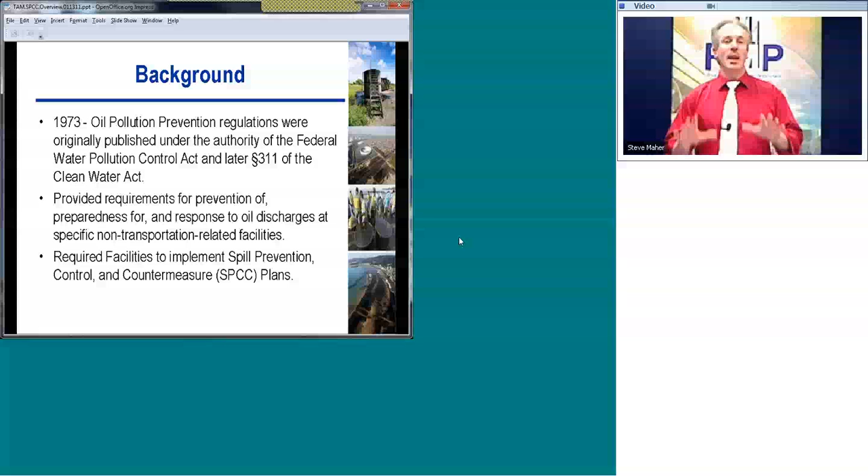However, the SPCC plans are focused on above-ground storage tanks, and that's what we're going to be focusing on - the regulations that apply to that.

Originally in 1973, partially in the aftermath of the late 60s release from platform A21 off the coast of Santa Barbara, oil pollution prevention regulations were originally published. It was later absorbed into the Clean Water Act, and these provided a basis for trying to prevent releases and also responding to those emergencies should they occur. It provided requirements for prevention, preparedness, and response to oil discharges, and it was specific to non-transportation related facilities. That's one of the things you have to be really careful of with these SPCC plans - where do they draw the line of what's covered and what's not.

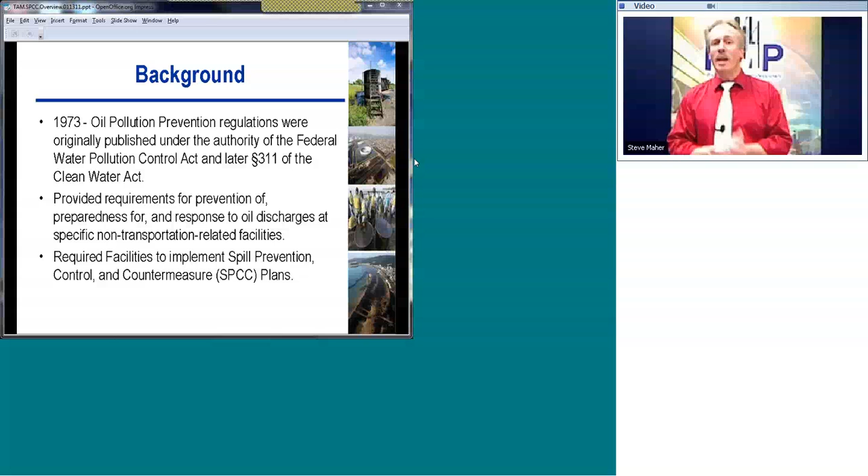SPCC plans, in the context of what we're looking at, primarily cover above-ground storage tanks with quantities of oil above certain thresholds - I'll talk about the quantities, the different tiers, and the types of oil in a few minutes. Basically, the idea of all these regulations is to put that SPCC plan together.

As I mentioned, several historical events precipitated this. Specific to the SPCC plan itself, the main trigger was the Floreffe, Pennsylvania oil spill. This is a 4 million gallon oil storage tank that split apart and collapsed. I believe one of the root causes was a brittle fracture of the carbon steel tank itself, and you'll see some photographs in a few minutes that are very evident that it was rather cold at the time.

This is at an Ashland oil storage facility, located near the Monongahela River, and the results of the spill had a significant impact on the river. We'll show you some aerial photos in a few minutes. And of course, in addition to all the environmental impacts, the legal and financial impacts on the company are very significant.

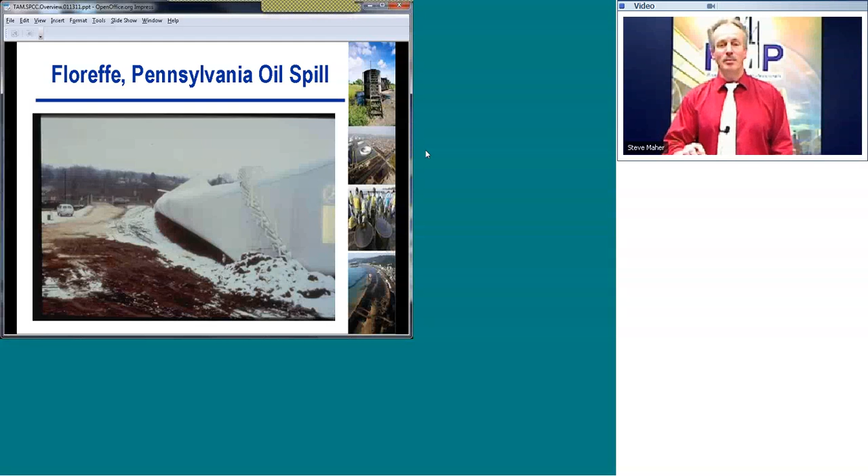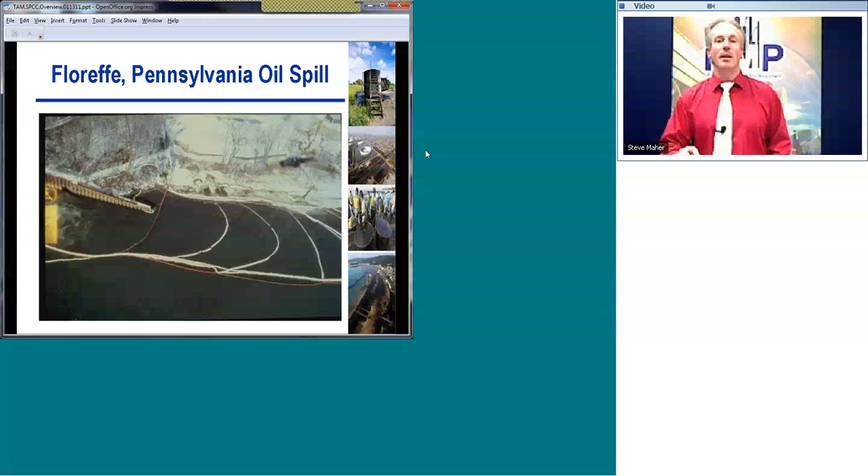So in response to the spill, the EPA formed a task force to look at the federal regulations governing oil spills from above ground storage tanks. Again, that's the primary focus. There are some caveats for below ground storage tanks - we'll get into those shortly.

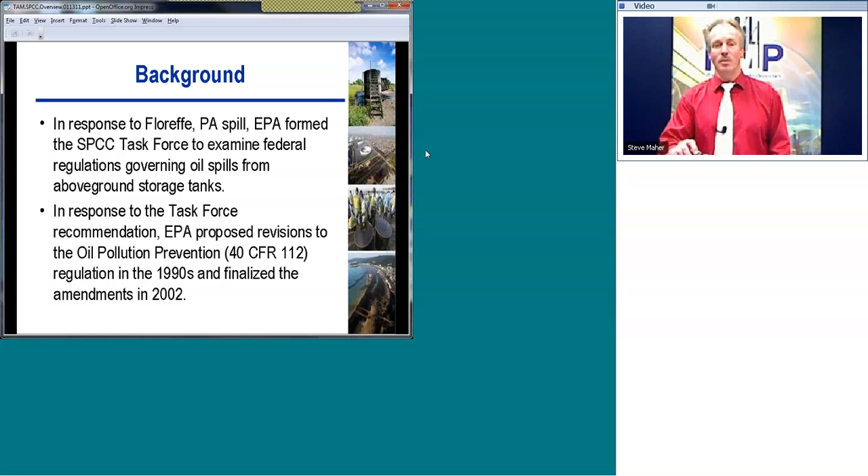In response to that task force recommendation, the EPA modified the oil pollution prevention regulation in the 1990s and finalized the amendments to the SPCC requirements in 2002. Since then, people have been implementing it and the EPA has been monitoring it. There are also various state programs that we'll be talking about in a few minutes.

But the EPA has amended the SPCC requirements of the Oil Pollution Prevention Act to extend compliance dates, clarify, and tailor specific regulatory requirements. For those of you doing your SPCC plan, there's a lot of gray areas in terms of diking adequacy, what's covered, what's not covered, types of oils. There's also a lot of things required by the letter of the law that in a lot of cases hardly represent a potential risk. These are all things you've got to deal with as part of the SPCC plan compilation.

The final rule was promulgated in 2002. Various amendments have taken place, and several deadlines were established. I think a lot of it was because of the economy and also the need to have a well-trained staff of regulators to properly enforce it. Compliance dates have been pushed off quite a bit, and a lot of people have enjoyed those relaxations.

And the latest compliance date for most people to formulate or update their SPCC plans is November 10th, 2011. That's what everybody should be working towards right now. Of course, there are exceptions - I'll get to those in a few minutes.

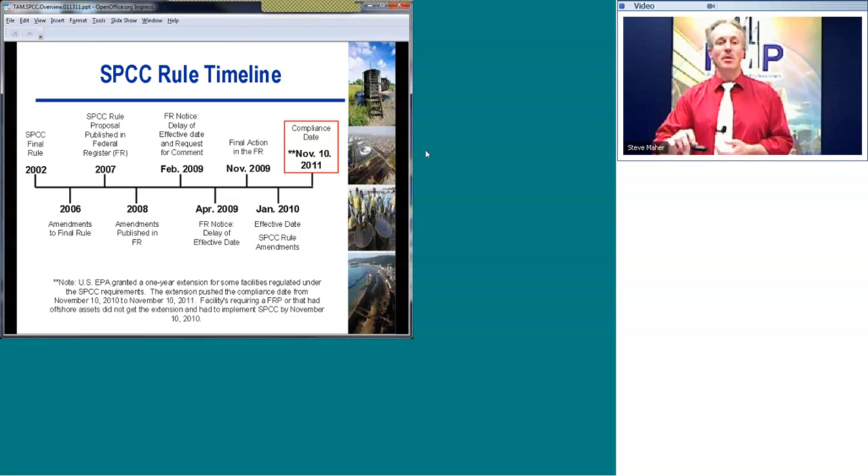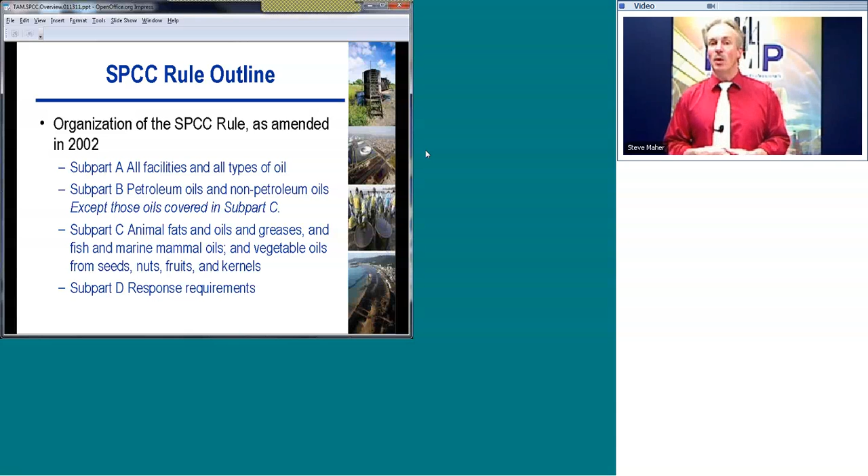Subpart D provides response requirements and clarifies those. Again, the key purpose of the rule was to provide requirements for prevention of, preparedness for, and response to oil discharges. There are a lot of other types of chemicals you may be concerned about that certainly could be harmful to the environment - things that are very acidic, things that are very caustic. Those sort of things are important to address, but are not specifically covered by the SPCC.

Again, the SPCC's primary purpose and focus is oil discharges, and it's also for non-transportation related facilities. Once it hits the road, it's governed under different regulations not encompassed by the fixed facility SPCC plans. The main objective is to prevent oil from reaching navigable waters and adjoining shorelines. So what does that mean? It means you want to have design, containment like diking, and emergency response plans that apply good or best practices to prevent that discharge from ever reaching navigable waters. Again, the focus is oil.

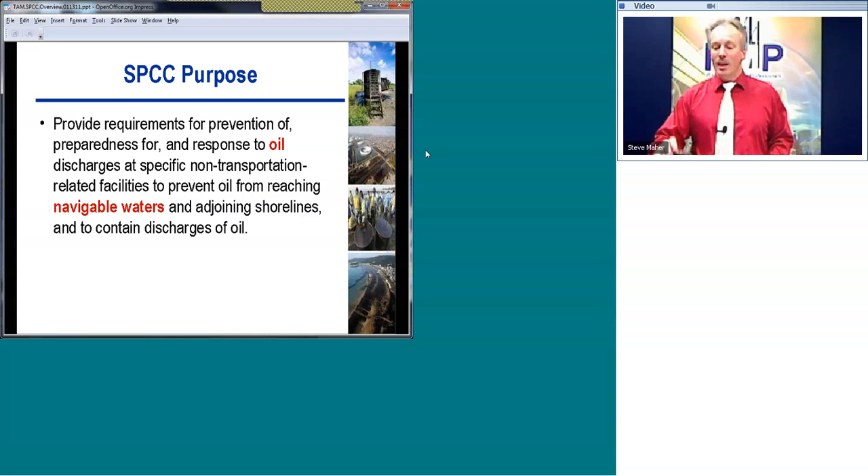Now, what does oil mean? Oil actually encompasses, by the SPCC requirements, a large number of chemicals that go way beyond just petroleum-based oils. Oil means any form, can be fats, which are solid above certain temperatures and typically at ambient conditions, oils, animal greases, fish, vegetable oils, oils from seeds, nuts, fruits, kernels, other oils and greases. Of course, it includes petroleum, it includes fuel oil, things that are like lighter hydrocarbons, sludge, which are very, very heavy hydrocarbons, synthetic oils, mineral oils, oil refuse, and oil mixed with other wastes.

You've also got a requirement to cover produced water from an exploration production facility that has certain quantities of oil in it, and again, we'll get to that shortly. So the main focal point, the main thing I want to get across here is it covers a very wide range of activities. Now, based on the kind of material, the amount of analysis that you do, the amount of things that go in your plan may be very different.

For example, fats, greases, things that are normally solid at ambient conditions - if there is a breach or a containment release and you're keeping the material heated so it's in a liquid state, and then if it's breached, it starts to cool down once it hits the ground and starts to solidify, those are the sort of things you can consider when looking at diking size, when looking at your emergency response activities, and what kind of requirements you have for emergency response. So again, you've got to consider very wide ranges of materials, but the types of materials and how you treat them and how they get handled in the SPCC plan can be quite different.

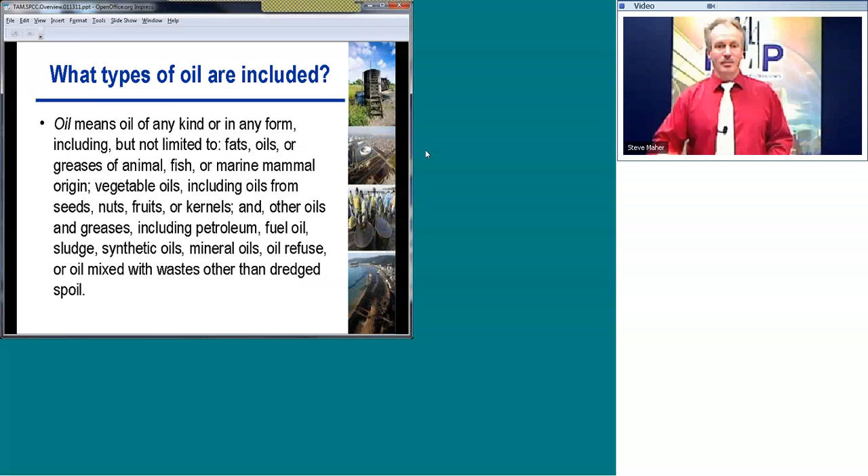And here's a challenging area. What are navigable waters? Let me go ahead and start with the definition, then we'll have a little discussion on that. Okay, based on Section 502(7) of the Federal Water Pollution Control Act, the navigable waters include interstate waters, intrastate lakes, rivers, and streams, which are utilized by interstate travelers for recreational or other purposes, and intrastate lakes, rivers, and streams from which fish or shellfish are taken and sold in interstate commerce.

Now, that doesn't sound like - if you read that, you probably look at that and go, gee, that doesn't apply to me. I don't really have a lot of things that are near navigable waters. Well, the interpretation can be broad or very narrow, depending on what EPA region you're in or what local jurisdiction you're in. Our observation is there's a lot of variance in interpretation.

The extreme case, and what I've heard a lot of regulators say, if push comes to shove and you've had a spill and they're in charge of deciding if you get fines or not, is you can be almost in the middle of the desert, and if you have a release and it can, over long periods of time, eventually percolate into some sort of river stream or get into the ocean, then basically in their mind that's something that's covered by SPCC.

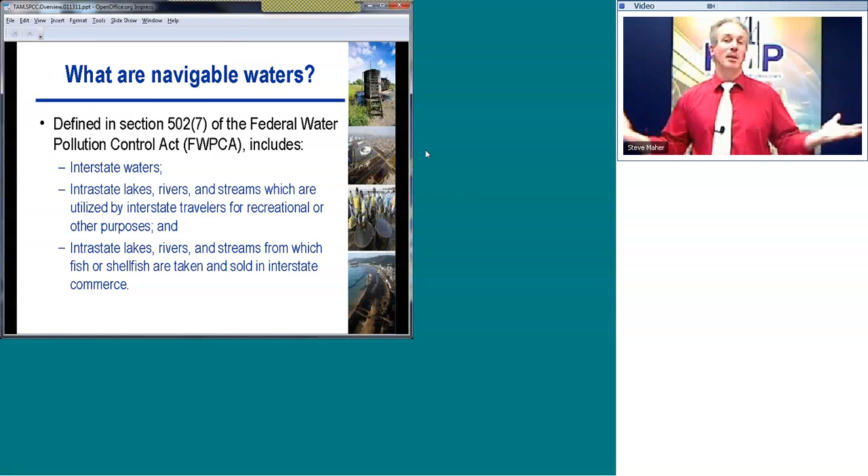My recommendation, again, is make a conscientious decision in light of your responsibility in terms of operating your facility to protect the environment and also to protect your company, and make a good decision in terms of how extensive you need to apply these kind of things, recognizing that your perspective on what makes sense may not jive with what a regulator's perspective is, especially if you've had a spill, they're in the political spotlight, and they're in charge of deciding whether to fine you or not.

Okay, again, general applicability is a facility with oil storage capacity exceeding 1,320 gallons in above ground storage containers and also where the capacity of each storage container included in this aggregate amount is 55 gallons or greater. That could reasonably be expected to discharge oil in harmful quantities into navigable waters of the United States or adjoining shorelines.

Again, there's some words like reasonable, and we discussed navigable waters. These things can be - we have seen vast differences in interpretation. Again, highly recommend that you take a good look at your system and also work with the regulator, and also if somebody's doing your SPCC plan, ask them, if they're not doing it for you, how this compares to what other folks in your area are doing. And also there is a provision for underground storage tanks of 42,000 gallons or more.

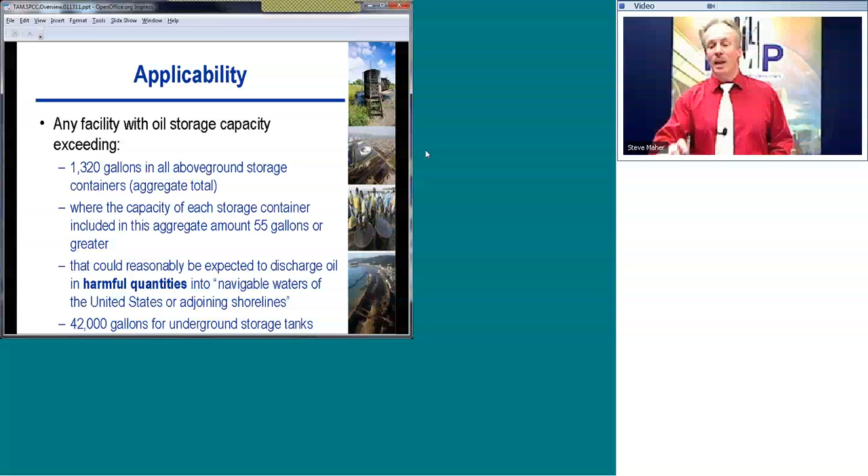Okay, what are harmful quantities? Basically a discharge that violates applicable water quality standards or causes a sheen upon or discoloration of the surface of the water, and may also have the potential to seep, leach, or flow into navigable waters.

This gets back to being rather qualitative. You're looking at something that causes a sheen, has the potential to seep. These are things that are subject to interpretation. My recommendation is to get somebody who's familiar with the applications in your area, what the specific requirements are, and make sure that you're doing something that makes sense. When in doubt, do something that really shows you're doing your job to protect the environment.

Okay, there are some exemptions. Under the SPCC requirements, there are some exemptions that apply when calculating aggregate totals. Basically, if you've got containers with storage capacity less than 55 gallons of oil, they don't have to be considered in the aggregate. Permanently closed containers, motive power containers, wastewater treatment facilities are exempted. Hot mix asphalt and hot mix asphalt containers are exempted. Residential heating oil containers, pesticide application equipment and related mix containers, intra-facility gathering lines subject to DOT regs, and also underground oil storage tanks at nuclear power generation facilities.

There are some very specific exemptions. If you fall in these categories, great, but most of these won't apply to the mainstream of a lot of the oil storage and production facilities that are out there.

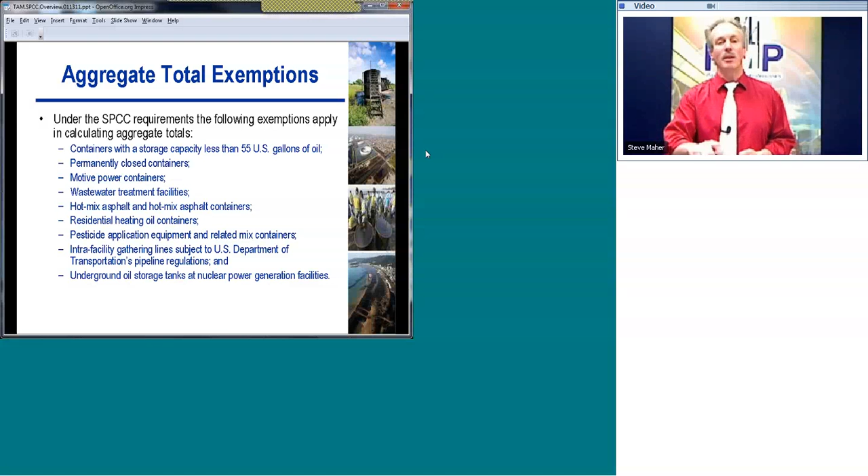There are various categories of SPCC that are based upon the total oil storage capacity. Depending on this aggregate total, you may be in various tiers, either Tier 1 or Tier 2, which is termed a qualified facility, or as an all-other facility. Tier 1s are facilities considered to have a lower environmental risk, and commensurate with that, you have less work to do for your SPCC plan. The all-other facilities category is the catch-all. If you can't fall into these lower tiers, you're in this all-other facility category, which means a full SPCC plan signed off by a professional engineer.

Tier 1 and Tier 2 facilities have an ability to use templates and have either no sign-off by a PE or a limited review and sign-off by a professional engineer. What type of professional engineer needs to sign off on that? What do they need to do for sign-off? We'll cover that in just a few minutes.

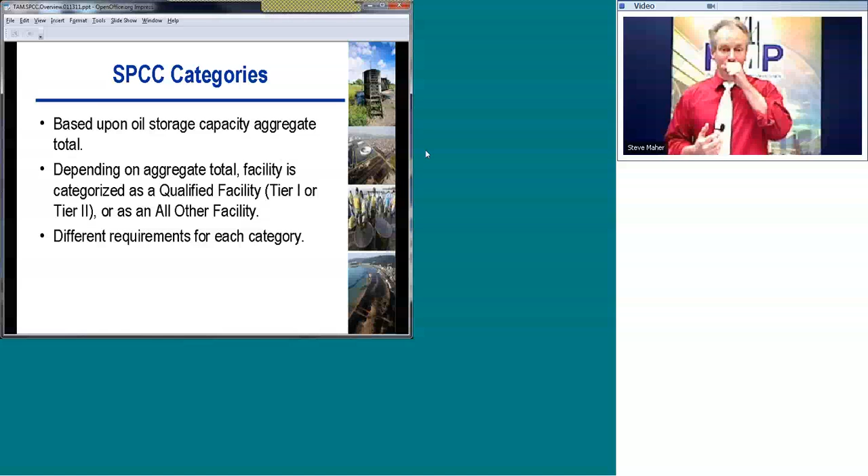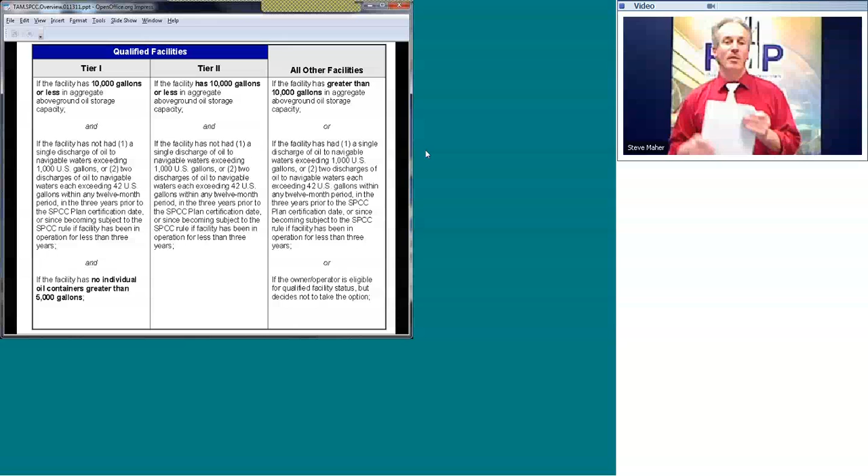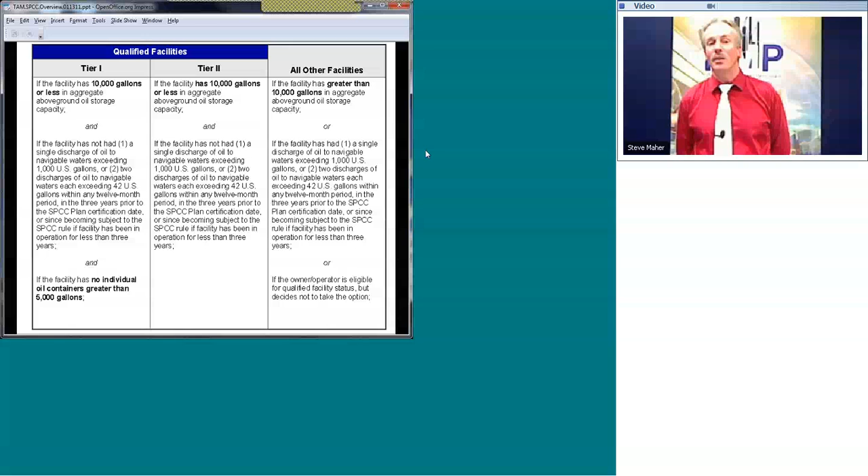All right, this is a rather extensive table, and I'm not going to read through all of this. Basically, this defines the different tiers. As I mentioned, the all-other facility category is if you have greater than 10,000 gallons in aggregate above-ground oil storage capacity. Tier 2 is if you have this, but you have not had a discharge, and you also have lower quantities. It has lower requirements, and even lower requirements are associated with Tier 1 facilities, which if you have 10,000 gallons or less in aggregate above-ground oil storage capacity, and you haven't had significant discharges, you can use templates and apply Tier 1 criteria to do a lot less work, which is also a lot more maintainable.

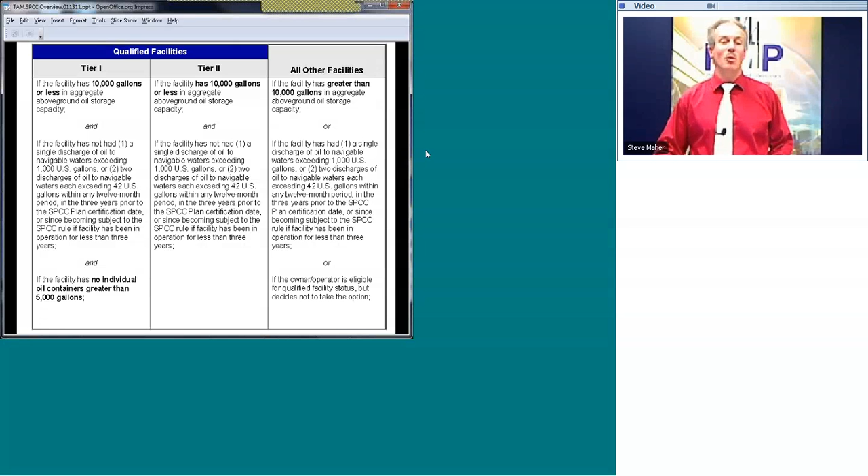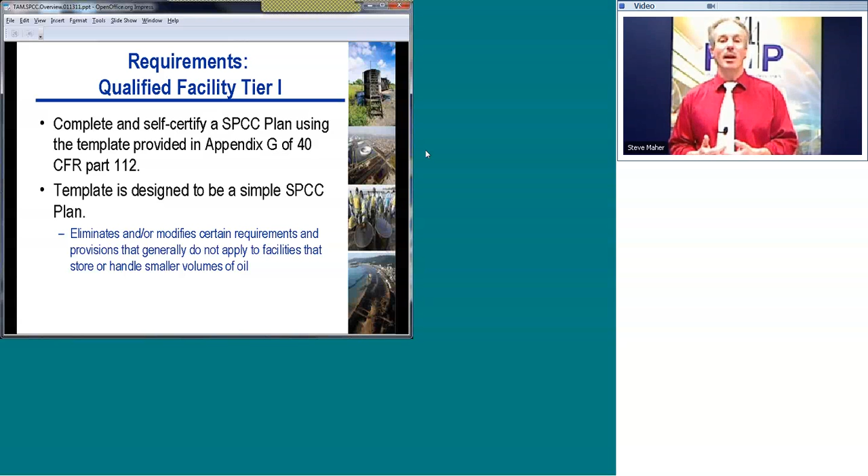So what are these Tier 1 requirements? You basically have to complete and self-certify. You do not need another consulting company or a professional engineer to review a Tier 1 SPCC plan. 40 CFR Part 112, which encompasses these SPCC plan requirements, does provide templates to help you do that.

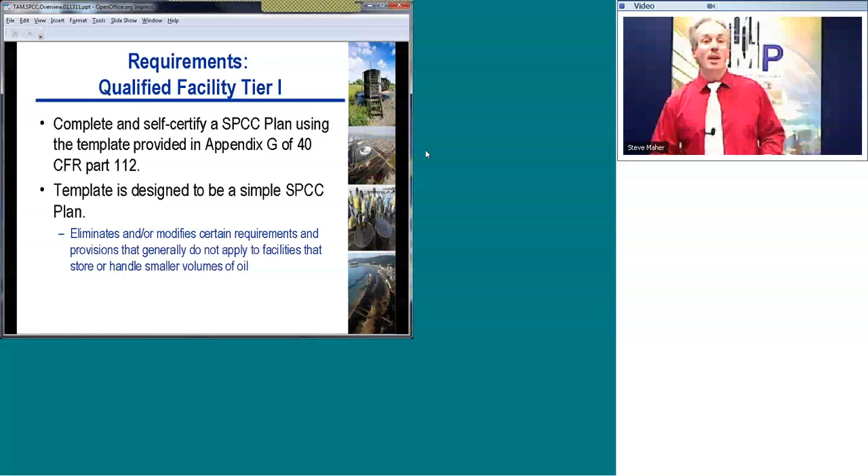The template is designed to be a simple SPCC plan. It eliminates or modifies certain requirements and provisions that generally do not apply to facilities that store or handle smaller volumes of oil. They're recognizing it's a lower environmental risk, so they're saying let's do a little bit less effort. The template itself includes a facility description and self-certification. You have to certify that the information is correct and that you've done a complete effort in terms of protecting the environment and putting together an SPCC plan.

It does require a 5-year review, identification of storage containers and capacities, what secondary containment you've got, inspection, testing, record keeping, and training, security issues, and emergency procedures and notification. Security issues can be a real bugaboo too, if you've got a remote facility that's normally unmanned, but you have to show that you're taking reasonable precautions to protect against intrusion, tampering of the equipment, and release of material that can impact the environment.

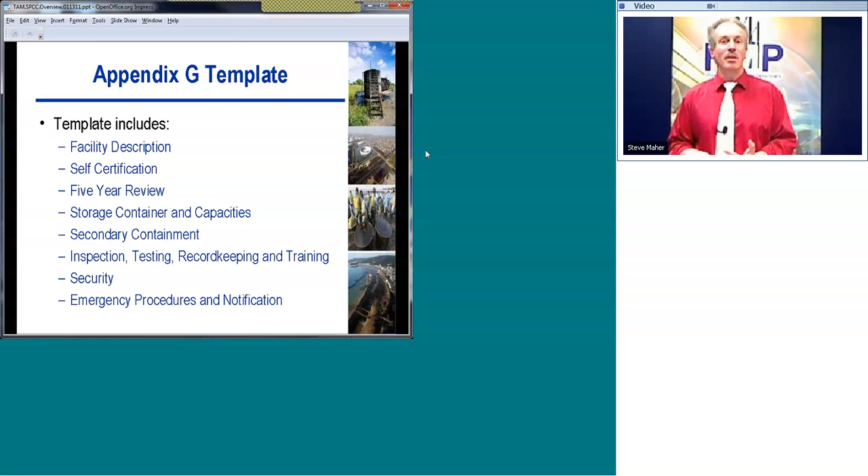This is a simple example of an Appendix G template, and again, if you need some links to this information in an editable form, just go ahead and contact anybody here at Risk Management Professionals. We do a lot of these SPCC plans, pull them together for people. We're also happy to provide free outreach information like this webinar, and also links to get this information and at least get you started on this stuff if you qualify for Tier 1 and can self-certify.

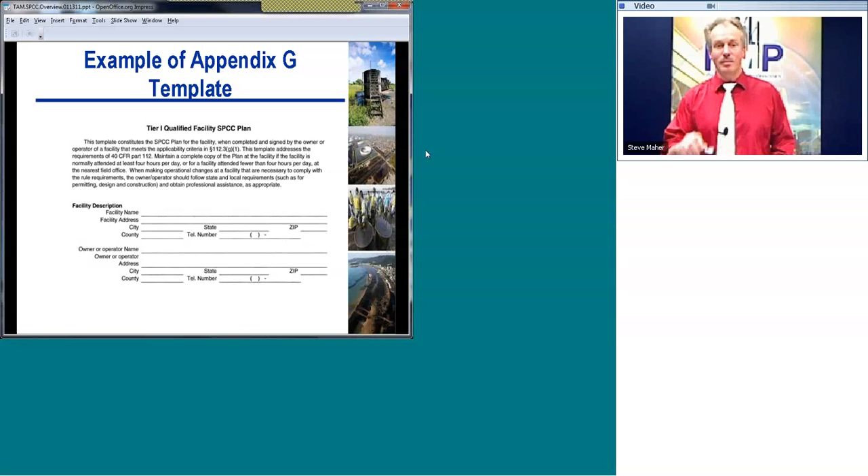And again, more examples of the Appendix G template. Let's take a look at the Tier 2 facilities.

Basically, the requirements are to complete a hybrid plan with either self-certification or parts of it PE certified. There are some nuances in subparts B and C that give you guidance on when you need to do that. My recommendation for SPCC plans in general is start simple, take a good look at your system, containment, protection features, and go ahead and start simple and then take it from there. There are a lot of consultants out there to help you, but I wouldn't overdo the consultants.

If you really need good support, call somebody who knows what they're doing. If you get a PE sign-off, unfortunately the rule is very loose in terms of the type of PE and their background. Talk to the person, ask them how many they've done, what their background is, what kind of professional engineering certificate they have, where they're licensed. Are they licensed in the state where you're doing your SPCC plan, or do they have comity - that's comity, not comedy - that allows them to transfer their certifications and sign the SPCC plan in your state.

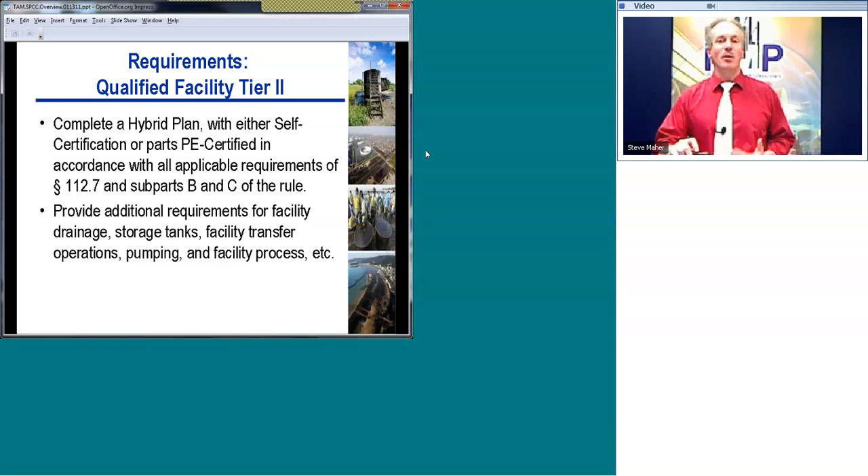These Tier 2 requirements do have some additional requirements for facility drainage, storage tanks, transfer operations, pumping, and facility process. So there's a little bit more to it. This slide also provides background for what we recommend as general contents of the plan, and links it back to 40 CFR Part 112, which defines the SPCC plan requirements.

Key plan contents include an approval page and sign off, whether you're self-certifying or getting a PE certification. Again, a warning about the PE certification: whatever went into making the rule, even though the PE is certifying that it was done in accordance with SPCC plan requirements, it still puts the ultimate burden in writing - also in 40 CFR Part 112 - of oil spill prevention, accuracy of the plan, and follow-through back onto the facility owner-operator. So even if you get somebody to sign off as a PE, that doesn't absolve you of responsibility for the accuracy of the plan and its contents.

The contents include management approval, a compliance matrix linking back to 40 CFR Part 112, physical layout and facility diagrams, covered materials, discharge prevention measures, and countermeasures for discharge discovery. How are you going to notice that? A lot of times if you have a large tank, it'll be a low-level switch or some sort of alarm feature. Also methods for disposal, contact lists for dealing with emergencies, who makes decisions, and how you contact emergency response personnel from the municipality or other agencies that can help if you need support. Also various forms for reportable releases, procedures for discharge discovery, failure analysis, and secondary containment - that's really important.

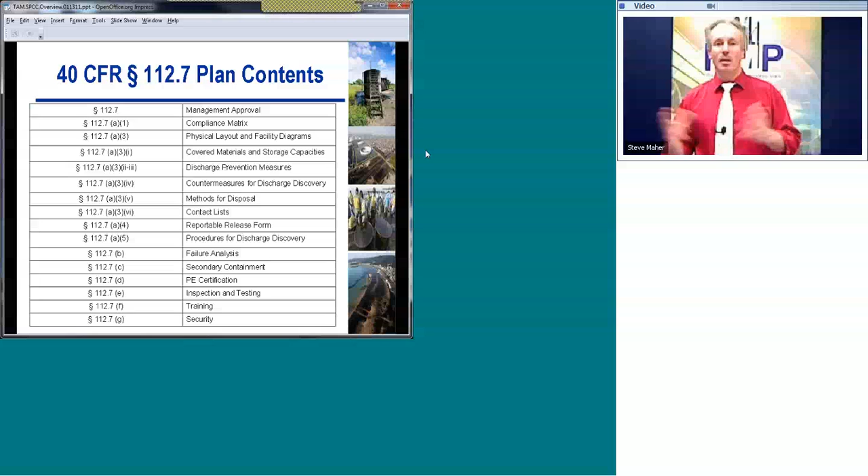They need some help focusing. They may not know your facility very well, so any help they can get to focus their efforts, I'm sure they'll appreciate. As the facility owner-operator, you can help them with their mindset on what's covered by the SPCC plan to keep their efforts focused too, and I think you'll appreciate that.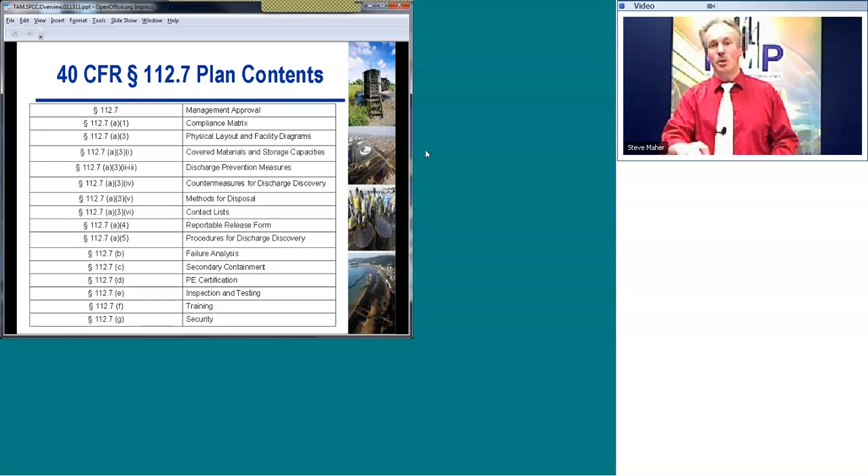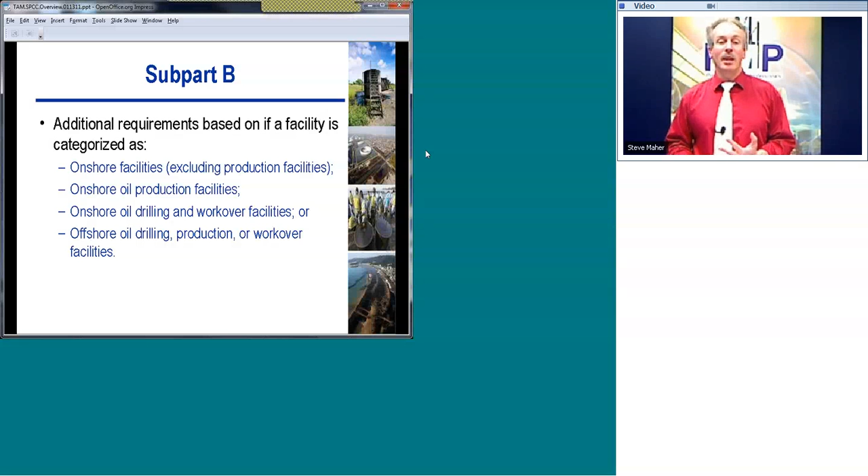Subpart B covers additional requirements for onshore facilities, onshore oil production facilities, and oil drilling, workover or production facilities for offshore facilities. Subpart B includes design of facility drainage systems and secondary containment drainage, inspection of rainwater in secondary containment, testing of above-ground storage container integrity on a regular schedule, and inspection of above-ground valves, piping, and other connections.

Subpart C provides additional requirements for animal fats, oils, and greases, fish and marine oils, and vegetable oils, including oils from seeds, nuts, fruits, and kernels. It has very similar requirements as Subpart B.

Then there are the requirements for all other facilities. This is the more extensive SPCC plan, where if you don't fall into the Tier 1 and Tier 2 categories, you've got a significant requirement for doing the SPCC plan and getting a professional engineer sign-off. This has to be a PE certified plan, in accordance with all applicable requirements of Part 112 and whatever subparts B and C apply to you. It includes everything that applied for Tier 2, with these additional subpart issues, plus the PE certification.

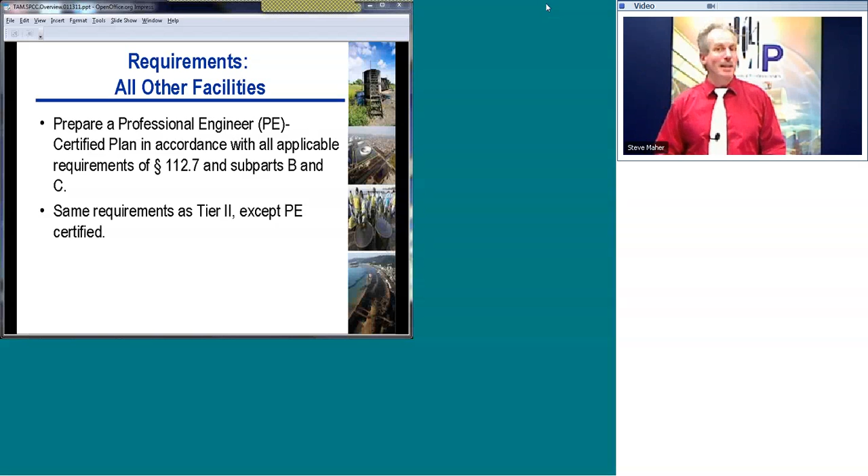So let's talk about that a little bit more. What is your professional engineer supposed to be doing, and what are they not supposed to be doing?

They should be familiar with the requirements of the SPCC rule. They should have visited and examined the facility. They should verify that the plan has been prepared in accordance with good engineering practice, including consideration of industry standards and the specific requirements of the SPCC rule.

This is very broad, so there's a lot of judgment involved, and it's important that you get somebody conscientious who is willing to do a good, thorough job looking over your facility and verifying that your SPCC plan meets the various requirements. If it doesn't, even if they sign it, it's still your responsibility as the facility owner-operator, so be careful whom you work with.

The PE is also certifying that procedures for inspection and testing have been established, meaning you have a process that the facility owner follows to inspect and test. That doesn't mean the PE is signing off that you're actually doing it—as an owner-operator, you're responsible for that. The PE is also certifying that the plan is adequate for the facility.

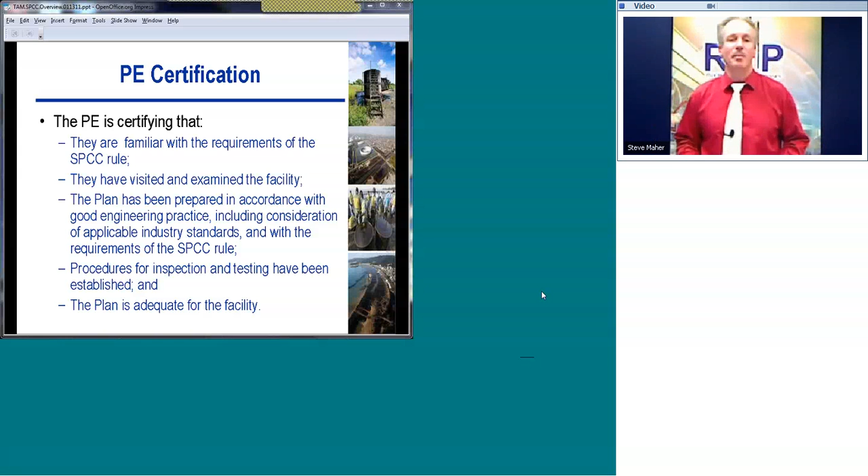Let's talk about response requirements. There is a requirement for facilities to create and submit a facility response plan to the EPA regional administrator if classified in a substantial harm category. You also have to fill out the substantial harm criteria checklist to determine whether the facility poses substantial harm to the environment. These are specific things done if you're in that substantial harm category.

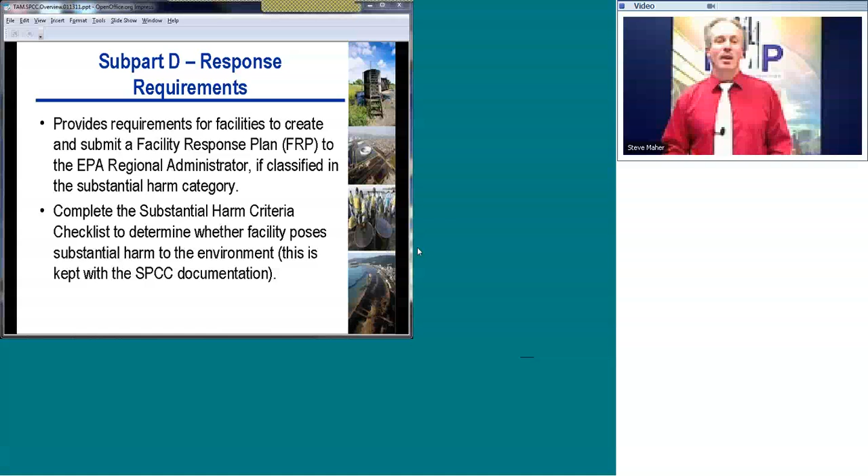There's a checklist that's a reprint of various portions of Part 112 to help you identify if you're in that substantial harm category, and also fill out that checklist.

One of the key things that has to get done is the field verification walkdown. Whether it's done by you as the facility owner-operator or by the engineering team including the professional engineer reviewing your facility or supporting creation of the SPCC plan, there's a requirement to go out there, take a look at the facility, and verify it's in accordance with the plan.

Another thing about field verification walkdowns and inspections: even if a regulator is out there inspecting it, even if the EPA or a state agency responsible for overseeing the SPCC plan visits, walks it down, gives you a clean bill of health, and drives home, that doesn't absolve you of responsibility for having a complete plan. It may be an inspector who's new and only spot-checked a few items. Just because they inspected it and gave you a clean bill of health doesn't mean that's your get-out-of-jail-free card if a problem arises or another inspector wants to dive into it more.

So as the owner-operator, you have to make sure all these things are done thoroughly, and the field verification walkdown is an important part of that. So what happens during one? It's mostly visual—you're going out there looking at the general condition of the equipment, general size of the containment, and reviewing documentation such as the emergency response plan and call-out lists and similar items.

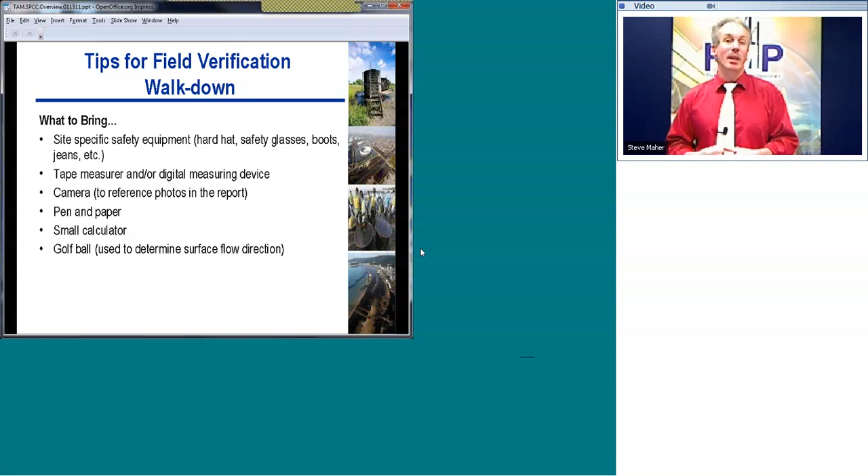Whenever we visit sites, you want to check with the facility owner-operator on what specific safety equipment may be required for that environment: hard hats, safety glasses, boots, jeans. When in doubt, make sure you've got that. Some oil production facilities may require what's called NOMEX, basically flame retardant coveralls you'd wear in case of a flash fire situation. That's unusual though; usually it's basic PPE like hard hat, safety glasses, boots, jeans.

I usually take a pair of gloves if I'm doing a lot of ladder work or getting into dirty environments. For a tape measure or digital measuring device, I'll usually have both: a 100-foot roll-up tape measure, a simple 25-footer, and also a digital measuring device. It's basically a laser device that pings a far wall and gives you the distance. They're pretty accurate, but only useful for low light conditions. If you're outdoors on a very sunny day, you may have difficulty using that tool, and it also doesn't work well on certain reflective surfaces. It's one of the tools in the toolkit, but you ought to have backups.

Also a camera. We take a plethora of photographs when we're on site. It's really handy back at the office when compiling the SPCC plan and pulling documentation together. It's also a very good record if the EPA comes to visit, or if you've had an accident, showing that you've done a thorough job on your field reconnaissance.

Pen and paper, obviously, to take notes. Some people take a small voice recorder so they don't have to write as much, but it's six of one, half a dozen of the other. That can be useful in some circumstances. I've used them before under very specialized circumstances, but usually for an SPCC walkdown, I don't feel a real need for that.

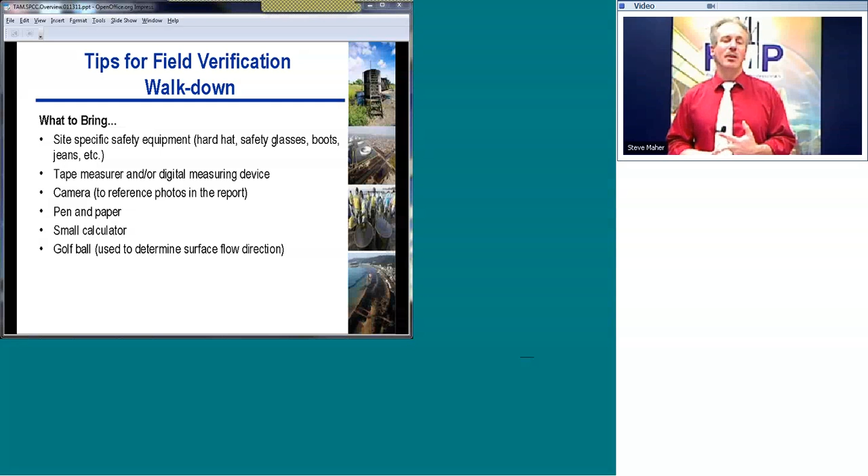Other things that are really handy: a tool belt. Just a standard one, go to your Home Depot or Lowe's and grab a $15 tool belt. You'll really be glad you did. It's got pockets for things because you're walking around the field carrying a lot of different items, and since it's a tool belt, it has a really nice clip for your tape measure device too.

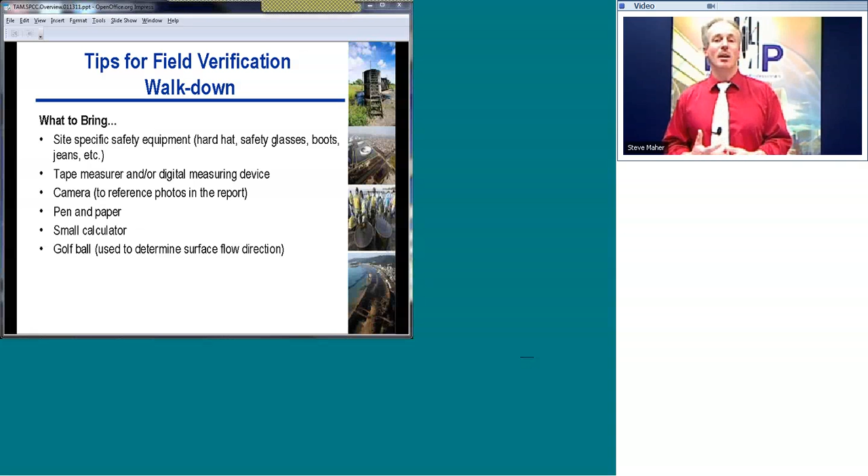Tips for secondary containment adequacy. The key thing is that the containment system has to have the ability to contain the oil such that it will not escape the containment system before cleanup occurs. There's a lot of issues there. Before cleanup occurs, you've got to look at percolation issues and the porosity of the berm or diked area.

We usually do measurements, sometimes with very amorphous shaped berms that can be a little challenging, but usually we'll take measurements and do some simple calculations to verify that the containment size is adequate for the tanks within. Something else to consider for some materials is sloshing effects, such that the material can slosh out if you get a major release very quickly. Also, sometimes you've got small quantities of material in a very wide area with very short containment wall heights.

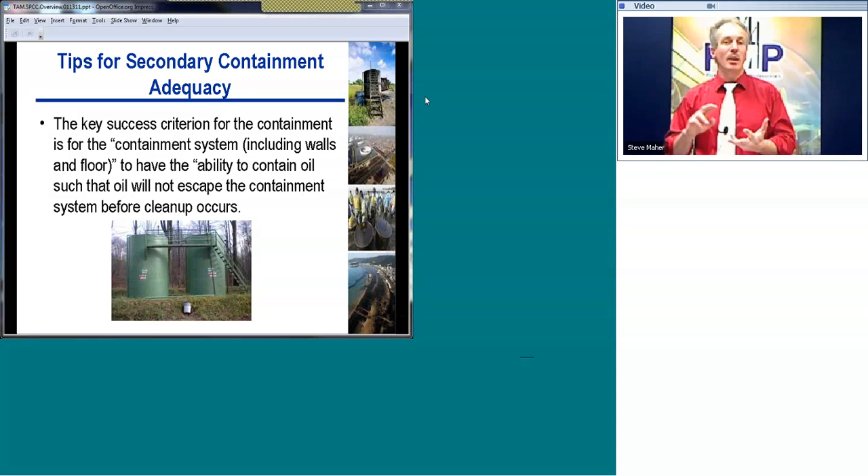It's okay to look at it and say, this is huge, it's more than adequate, and document it like that in your SPCC plan walkdown notes. If it's a large quantity of oil with a specific containment designed for that, it's probably good to do some measurements and calculations. If it's a very small quantity of material in a very large containment area, you may just use some judgment there.

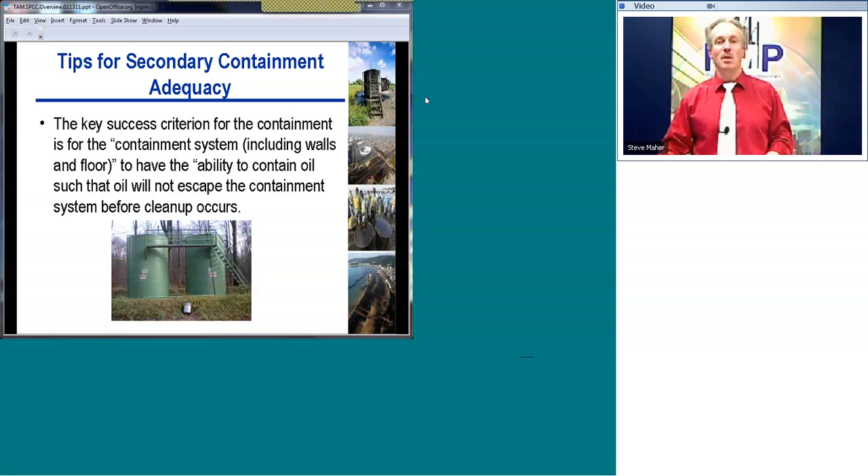Also, some tips and recommendations about drain valves. They usually should be capped, or you can have a valve kept in a closed position on the drain valves. Usually you want to make sure you've got some mechanism for ensuring that connection is closed and/or capped in some manner. In some cases, you want to make sure you have either a double valve or a valve and a cap to ensure adequacy of containment even if one of the devices is leaking.

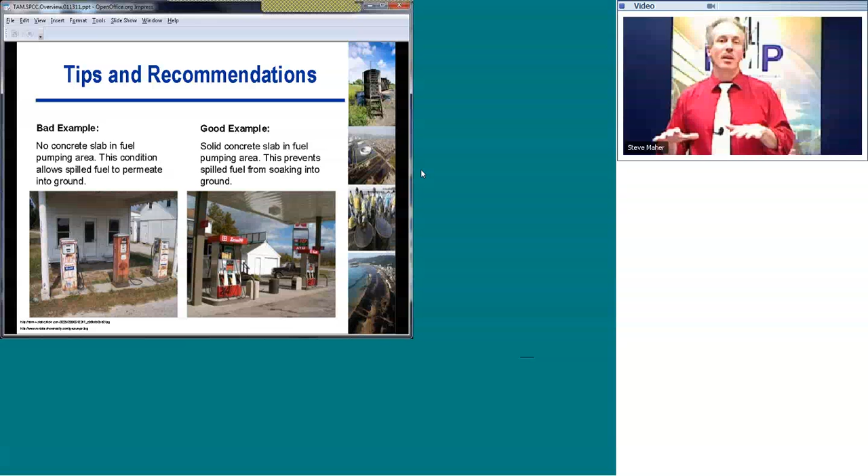The photograph on the left is not a good example of a pumping area or a filling area. You don't have concrete or any sort of pad, so if there's a spill it can permeate into the ground. A good example of a fueling area or oil transfer area is on the right. If there's a spill, there's some sort of concrete pad to contain it so you can have a controlled mechanism for cleanup and it won't soak into the ground.

Other tips and recommendations. On the left, you've got a situation where there's no secondary spill containment, such that if there is an overflow, it can go into a local drain or even run outside the building. A good example of secondary containment is on the right, though it's maybe not so good once I look carefully. Right now you've got 3 drums on a single containment area. You want to verify that pad underneath is at least the capacity of 1 55-gallon drum.

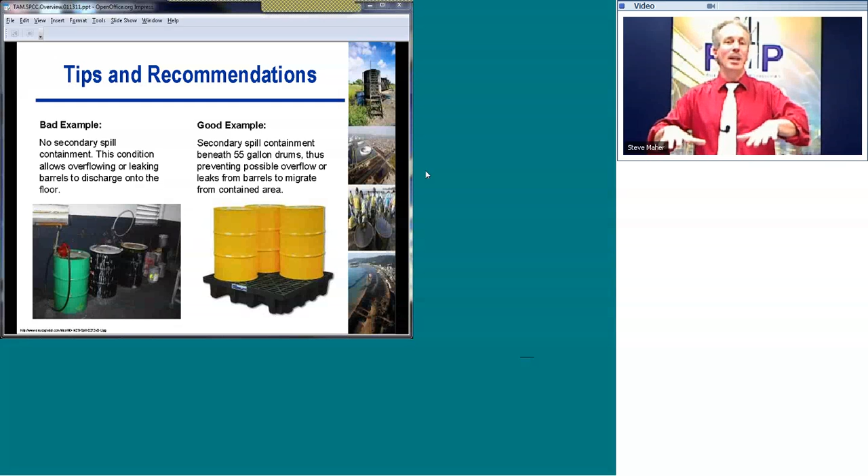This one has a grid on it to keep the drums up, but I've seen cases where there isn't a grid and the drums sit right in the containment. You've got to keep in mind that the drum itself can displace the volume available in the containment. That's also true for those 2 large green tanks we saw a couple slides ago.

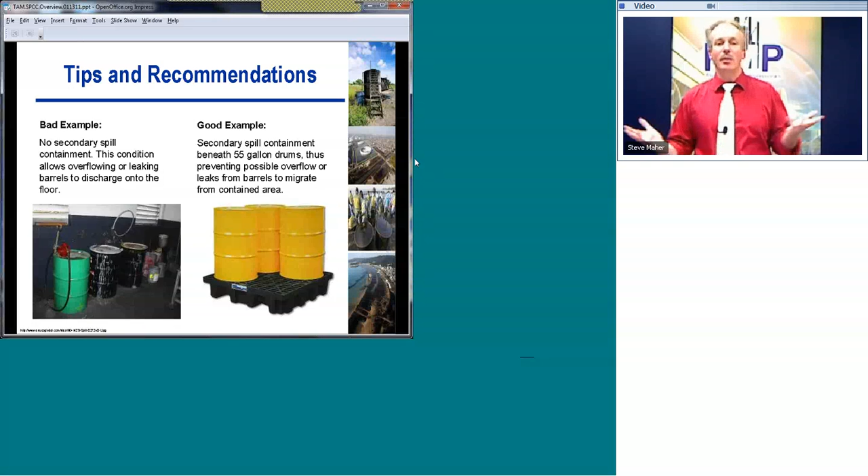Other tips and recommendations: drains and service ports need to be plugged, capped, or double valved, and you need proper secondary spill containment. Again, the example on the left really isn't adequate. The example on the right is much better in terms of containment if there's a spill, and they've also got them properly double valved or capped off.

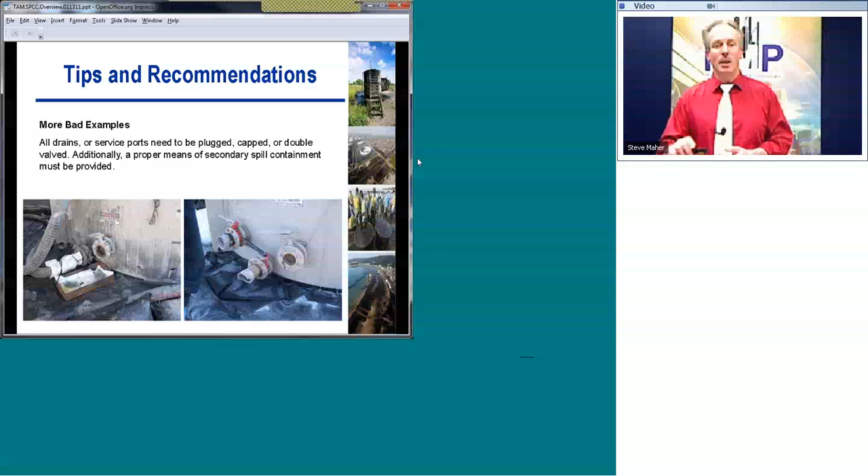So this would be something you don't want to see at your facility, and if you do, you want to take some pretty near-term steps to take care of it, clean it up, and apply appropriate practices that you'll establish as part of your SPCC program.

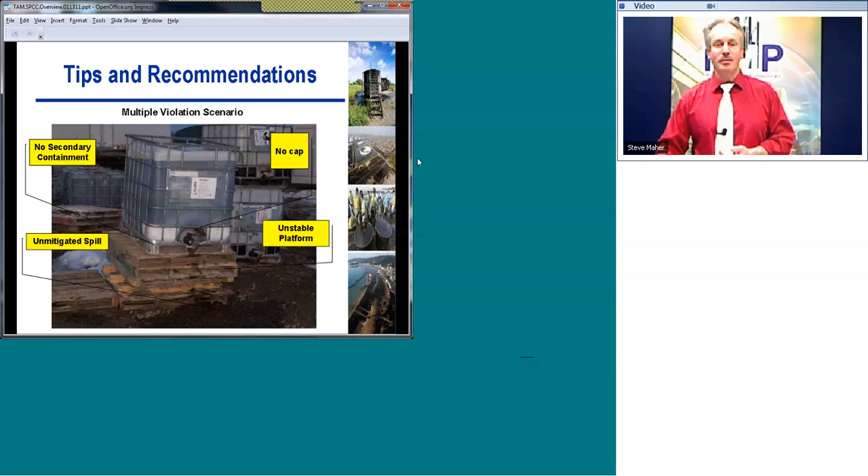Other tips and recommendations: multiple vessels sharing one secondary spill containment area. Again, you want to consider what your total volume is should the worst or largest vessel leak into there, and how much containment would be available given that other devices or equipment may be in that containment dike.

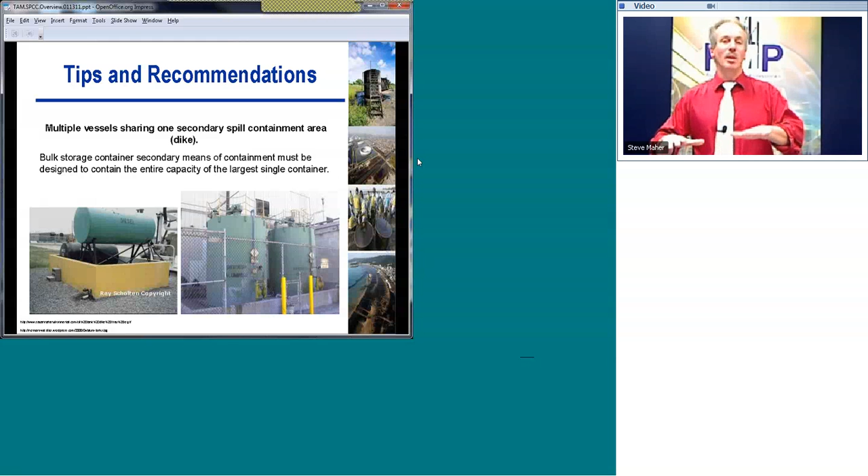One of the things you can consider, obviously, is physics. If your larger container is actually below the level of the containment wall and it's displacing some of the containment volume, well, once the levels equilibrate between the containment and the vessel itself, you're still going to have some material left in the vessel. So it won't be all the contents of the vessel that have to go into the dike, only that down to the point where the levels equilibrate.

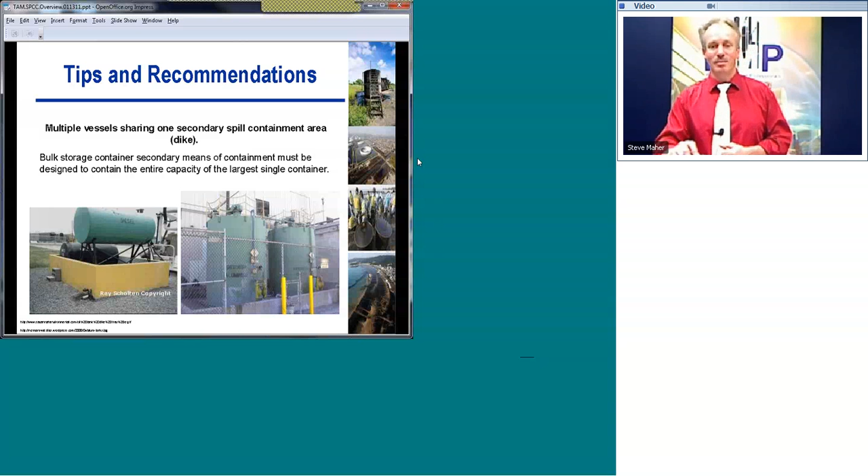Other tips and recommendations for double wall tanks: double wall tanks do not require secondary spill containment. If you're looking at flow metering devices or liquid level gauges, that goes back into a mechanism for monitoring the potential for spill. So double wall tanks can be pretty handy in a lot of circumstances, and here you're looking at cases of diesel and gasoline storage.

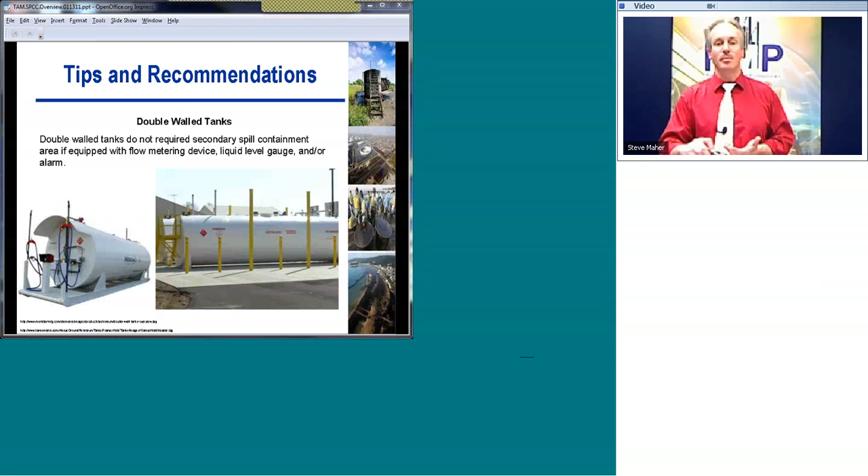Other tips and recommendations: spill kits. When doing your SPCC verification, you ought to be inspecting them, verifying they're complete, and if they've been used or the seal's been broken, that the contents have been replenished. A lot of times if people use something, they'll say 'we'll take care of it later,' and nobody ever gets around to replenishing the materials in the spill kit. They may not be on an inspection program, so maybe take a look at them every quarter at least.

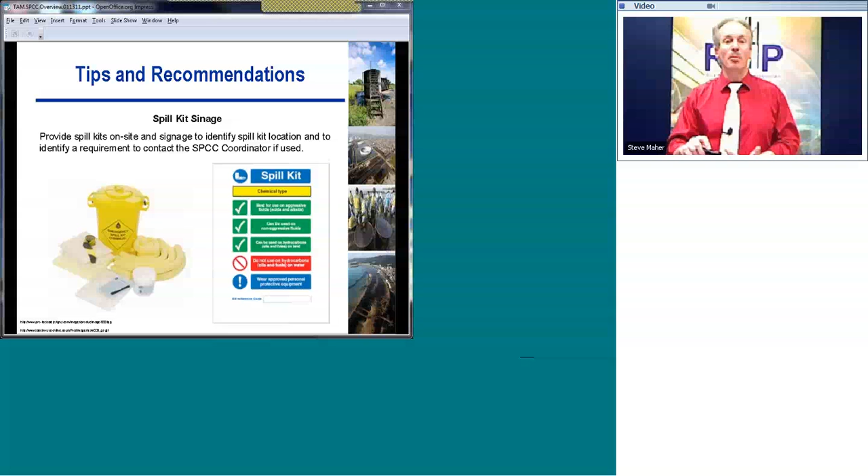Also signage: you want clear identification so people know where spill kits are. If they're kind of in the back somewhere, maybe post a little sign identifying where the spill kit is so people can find it during an emergency. It may also be part of your training program when you roll out the SPCC plan, making sure personnel are appropriately trained. And for exploration and production facilities, make sure you've got strategically located bins with spill response equipment, to help maintain that overall responsibility to the environment.

So let's talk about compliance dates.

If you've already got a facility operating, you've had to do an SPCC plan, make sure it's amended or updated no later than November 10th, 2011. If it's been operating after August 2002, make sure you implement an SPCC plan no later than that same date. After November 10th, 2011, if you've got a new facility coming online, make sure you've got an SPCC plan in place, people trained, totally effective, before beginning operations. That means it's got to be signed off, all inspections done, before beginning operations.

Given the fact that there have been a number of extensions, and given the political pressure because of the April 2010 Macondo well release, I wouldn't see that date being extended again, but who knows. Right now, I wouldn't count on it. I would gear up to make sure your plan's in place by that time.

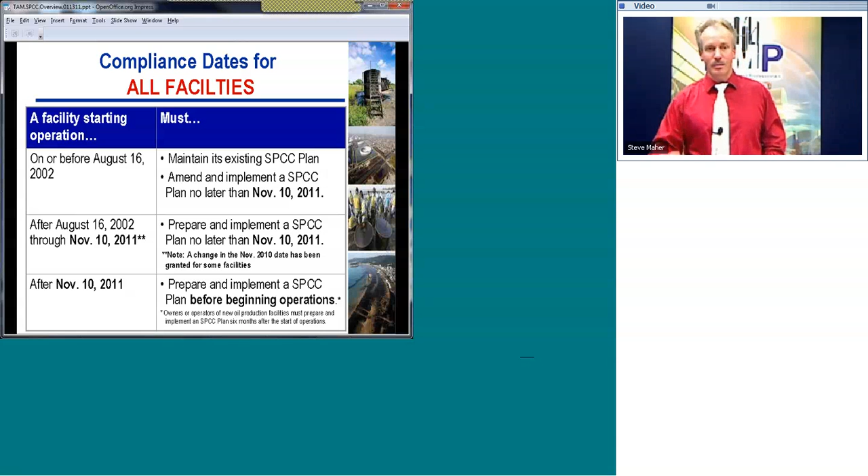Also, I mentioned state programs. Some states have adopted programs similar to the SPCC. In addition to meeting federal requirements, there may also be specific state requirements. A lot of states do have this - Pennsylvania, New Jersey, Louisiana, Florida, Washington, Oregon, Maryland, Delaware are some examples. California also has state programs, but primarily it's just administering the federal requirements of the SPCC. Are there acute differences? No, it's pretty much the same animal, but be aware of your state requirements. Make sure they're met, and if you're doing a whole lot differently, take a second look or call somebody.

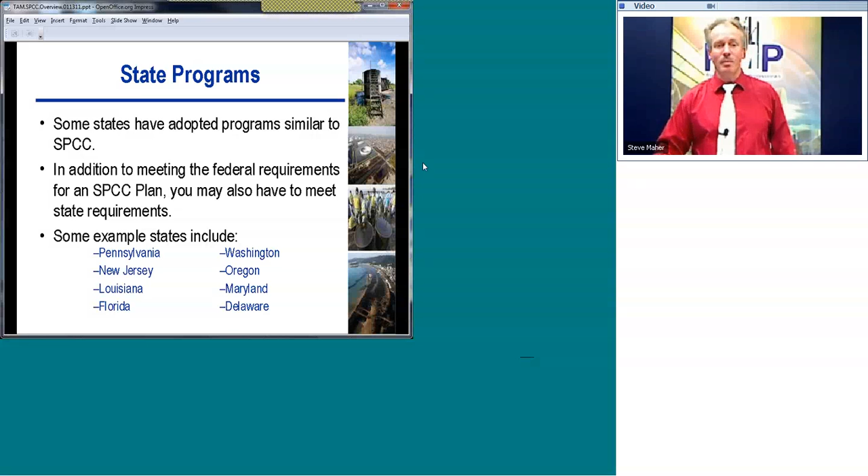Also, what I'd recommend in terms of emergency response - we've cycled into this on numerous occasions. If you do have an emergency or a spill, there's been a lot of discussion in regulatory communities on how to handle that. One of the things that gets facilities operating a site with potentially hazardous materials into trouble the most is hesitation - hesitation to call the agency or municipal emergency responders. Now that doesn't mean willy-nilly calls for nothing, but if you think there may be a potential need for additional assistance, it's good to call them. You can tell them that you're addressing it right now and think you've got it under control, and you'll advise them shortly.

Notification requirements are critical. Not being notified gets people into a lot of trouble. Even if it's a non-emergency spill that you've contained and addressed, and you're calling your cleanup contractor, you also need to provide notification. It's really easy to pick up the phone and say simply, hi, my name is so-and-so, this is a non-emergency notification, our opinion right now is we do not need agency response, but we wanted to notify you of the spill we've had. It's rare that they'll do anything other than just write it down, and you've fulfilled your notification requirements, making sure you won't get in hot water later.